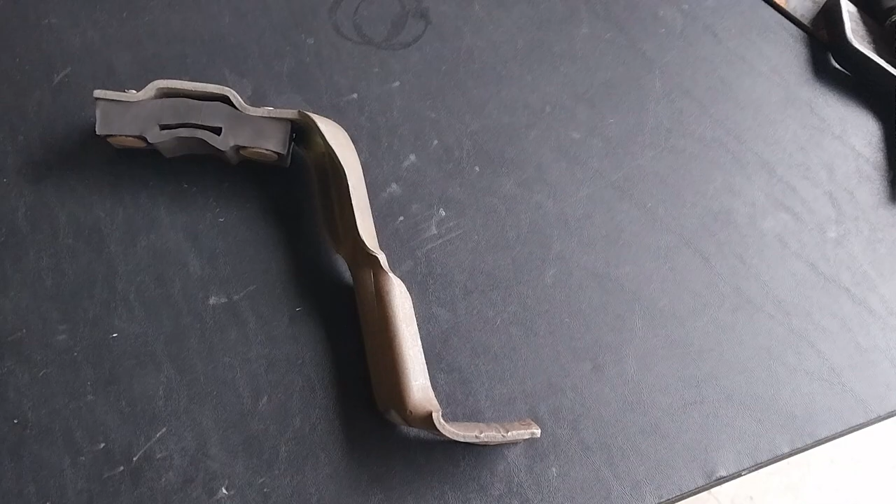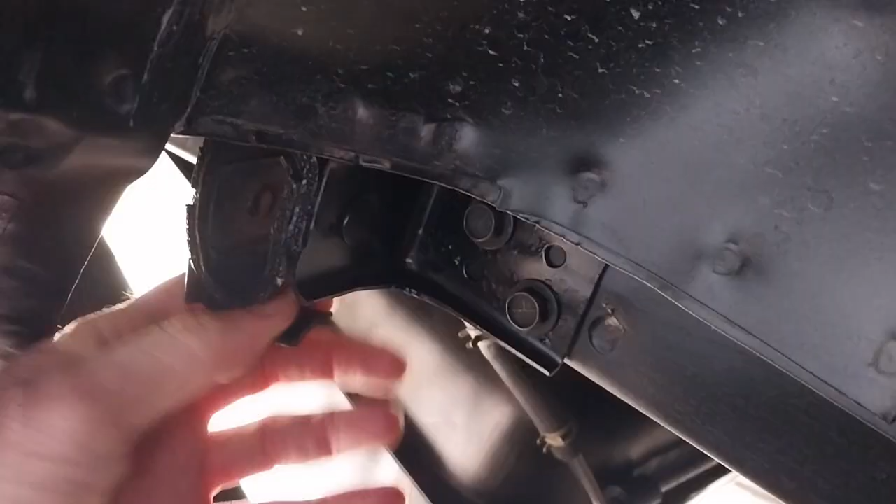All right, looking to install my exhaust hanger. This is on the rear left side. In a previous video I showed you guys I already installed the one on the rear right side. Okay, and now I've got the other one here.

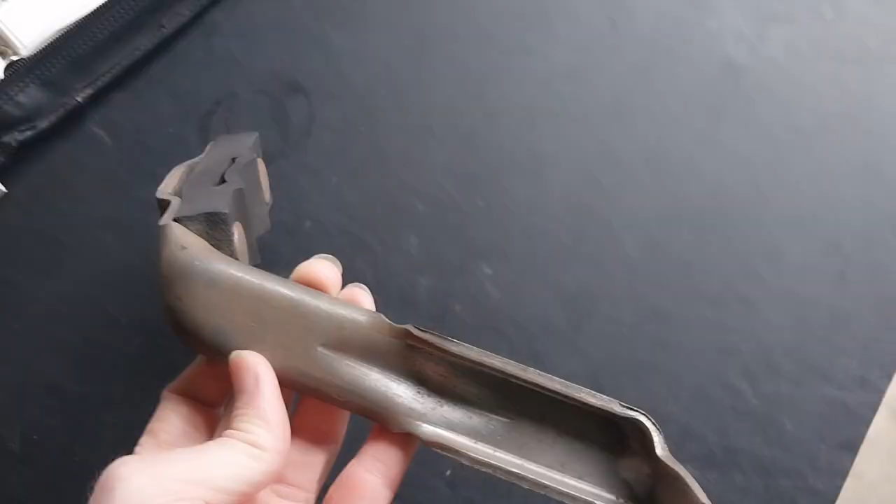So I bought that one and then this one used. I was able to find a guy who had a bunch of extra parts, and I got a hold of the hangers. This one here was particularly hard to find, but I cleaned it up. It's been a while, so it's kind of starting to rust over just a little bit. You can kind of see it, so it'll need a little bit of cleaning before I do a final install, but it's pretty thick and in decent condition.

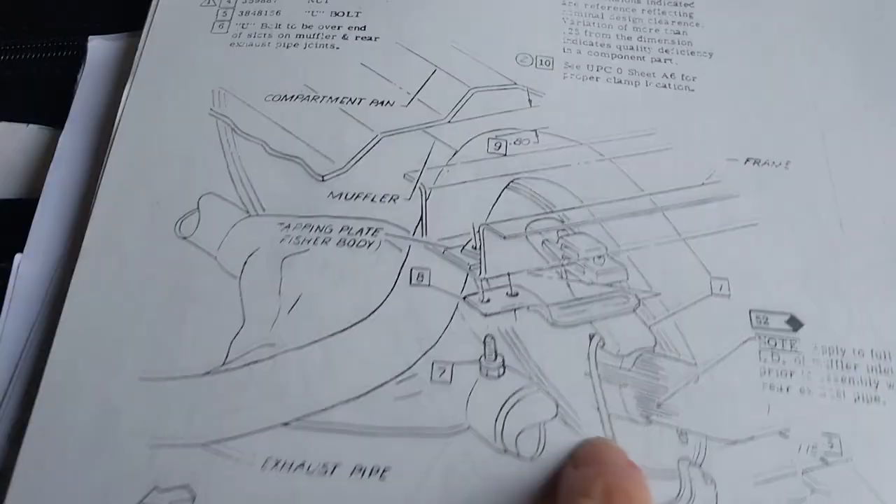The rubber's in decent condition. The only thing I cannot find anywhere is the bracket that attaches to the frame. So there's the hanger right there. It goes down and curves down, and then right there's the exhaust pipe, and it straps to it. And then this piece here is the hanger that I cannot find.

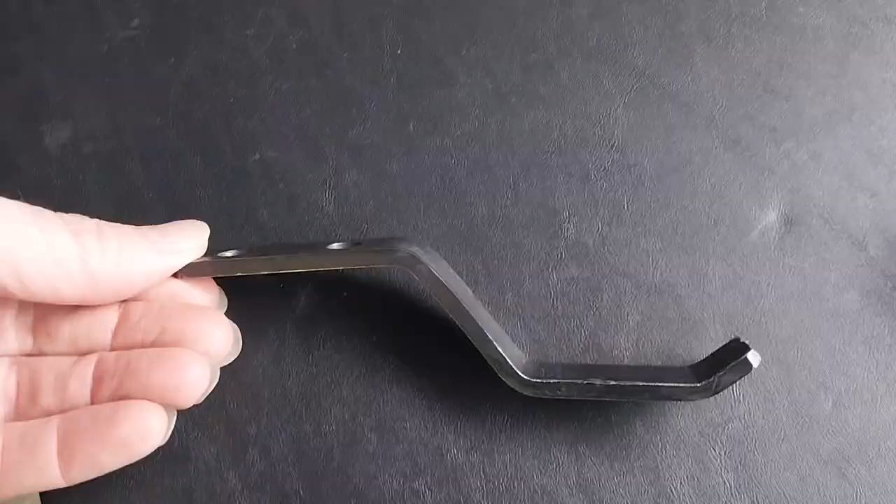So I did make attempts to make one. This is it right here. But it's not wide enough. It moves around way too much. It's half the width that I need.

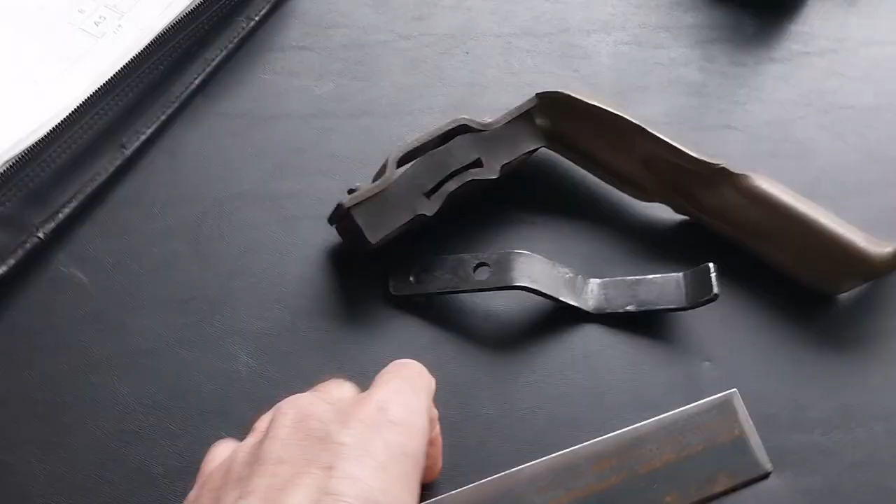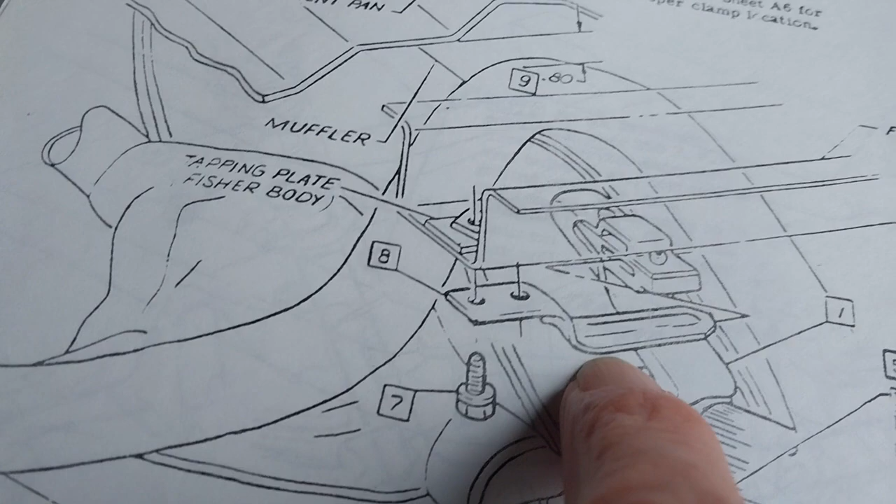So I was able to get another piece of metal like that, and that is the perfect width, and it'll fit nice and snug right in there. So what I'm going to do is get this cleaned up and bend it to fit that size. I've got the hole location right in this one here, so I'll transfer the holes over. Looks like it comes down at a 90, down and then over again, and from the looks of it has some type of hump in the center. I'm not going to do that, but I'll do these bends, grind it, get a nice round nose to it, clean it up, and go from there.

And then for the install, again, it's on the back left, right there - these two holes here, they're in there. So these bolts broke off, so I had to re-drill them. That's why they look nice and shiny in that location, because I had to rethread those and drill them out.

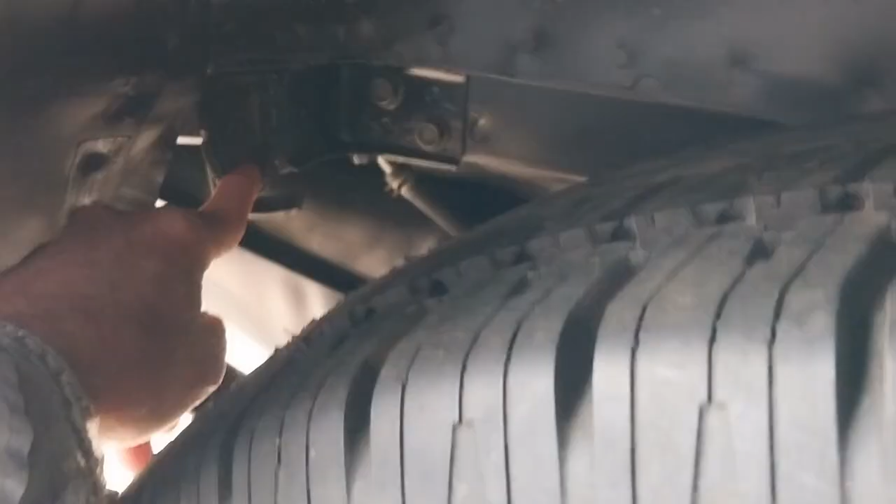A reminder, this is a single exhaust, so if you have a dual exhaust, it's different. The dual exhaust takes advantage of these and more of these - I think there's one of these on both sides and a different hanger. So there's actually a kit you can get for the dual exhaust. Single exhaust is nowhere to find anywhere, so I had to track down the parts. I'm going to get working on this and go from there.

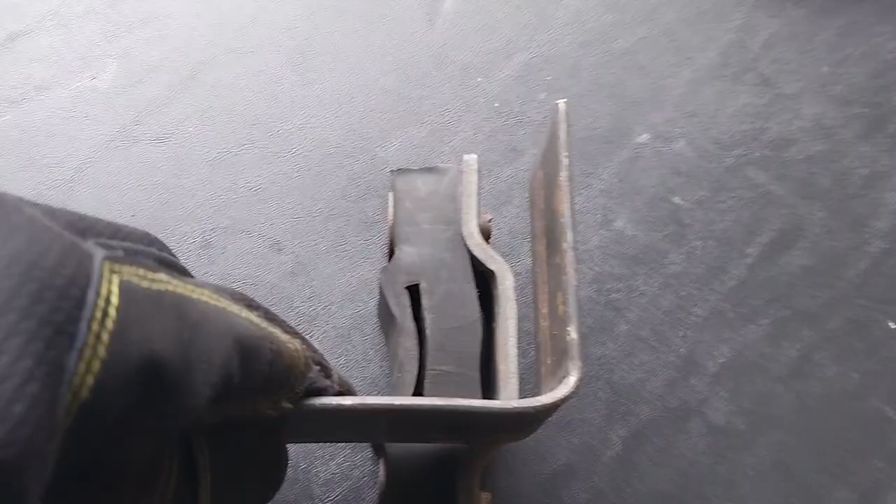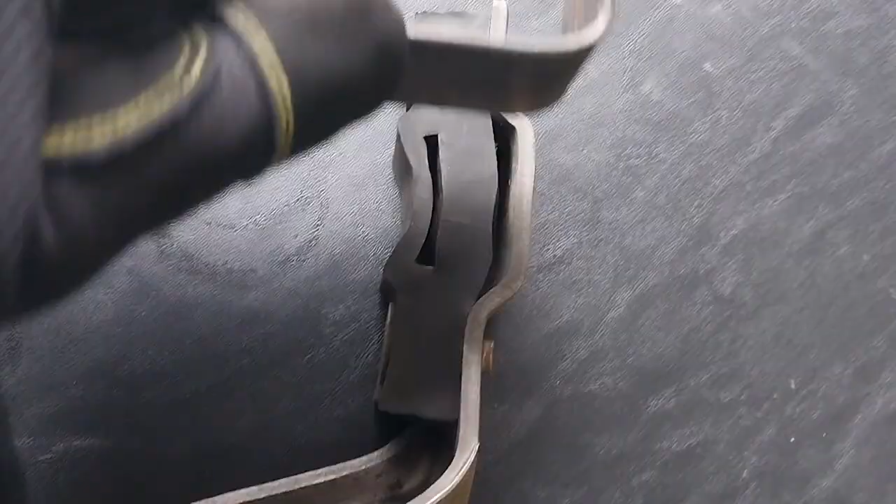All right, get the first bend in. So then the other bend, you want to make sure you have clearance. Okay, so you got that gap - here's your frame of the car. You want to make sure that it has enough clearance, plus it's going to move around. You want it to come down that distance, because this end bolts to the car like that.

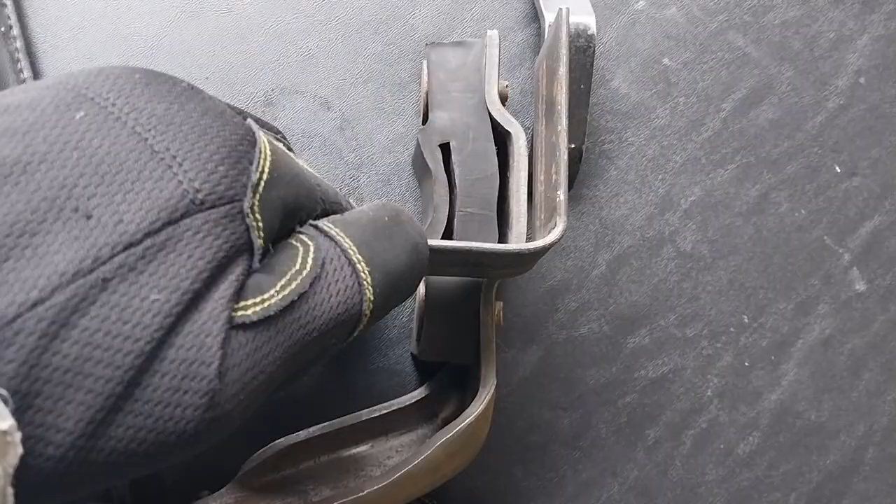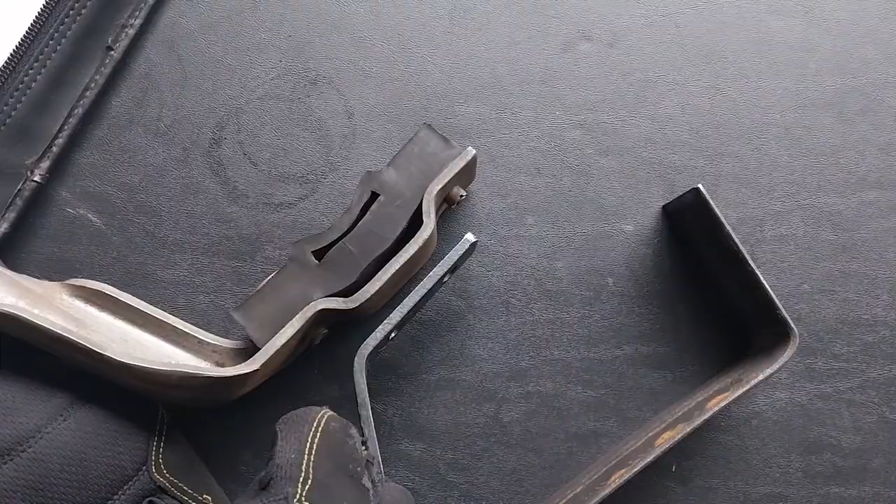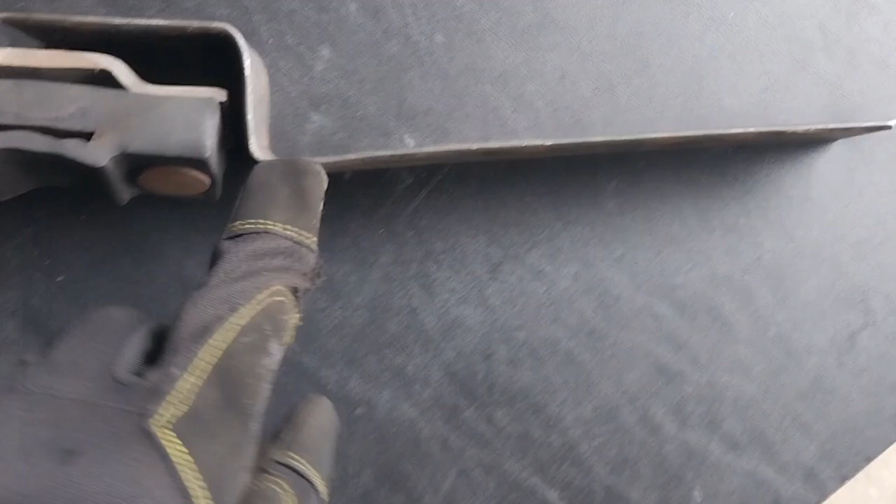So I'd say right about my finger is about the good distance we need - maybe a good 3/4 inch or 1/2 inch between the bracket. All right, there we go. So it's going to sit at that level. We've got the bolt that comes down where my finger is, so it needs enough room for this thing to be moving around and not bump up against the top. So that's probably good.

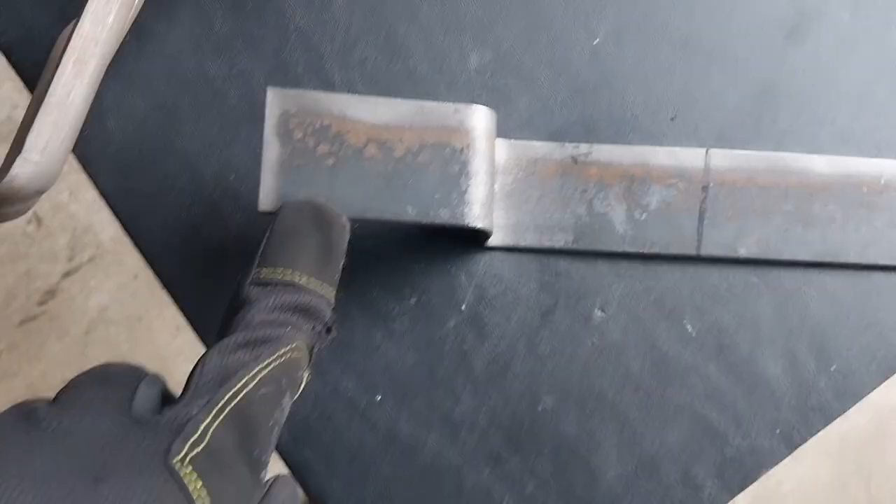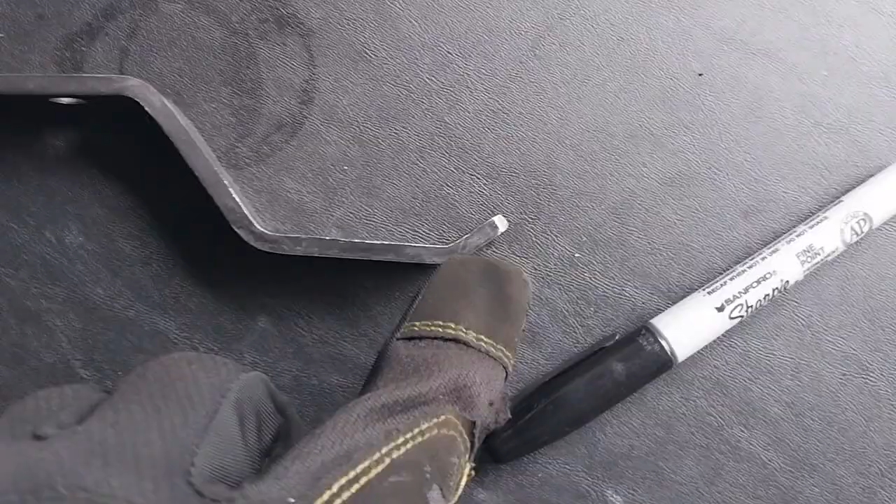And then our length - we need to cut off. Based on the drawing, it's really hard to see the exact length, but I think it's almost about 1.5 times, maybe 1 3/4 the length of this top part here. All right, so I'm going to go about 3 inches. What I'll do is round this edge here, the front edge, and then have this bent up just slightly. I don't know how that nut does not slide off, so I may put that bend in at the end like I did here. We'll see how it goes when I'm done.

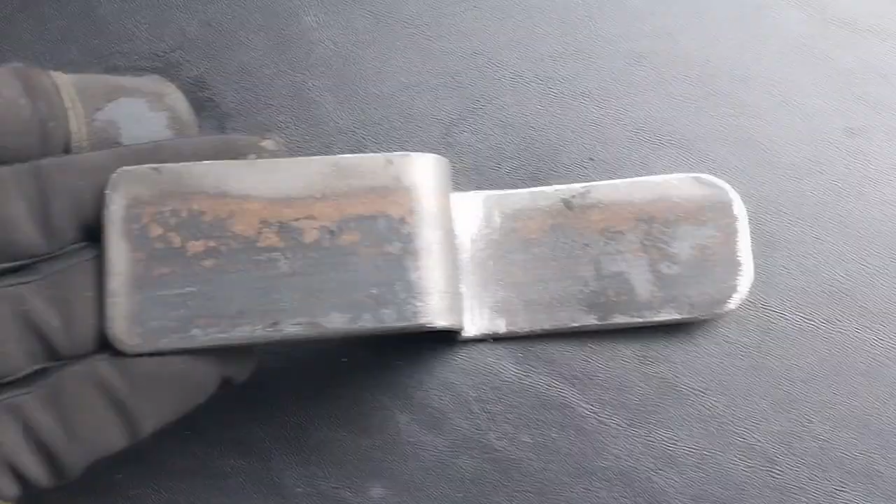All right, there we go. So I will drill the holes and get this cleaned up and go from there. All right, there we go. Cleaned up, there we go. The hole's in there, this is all cleaned up.

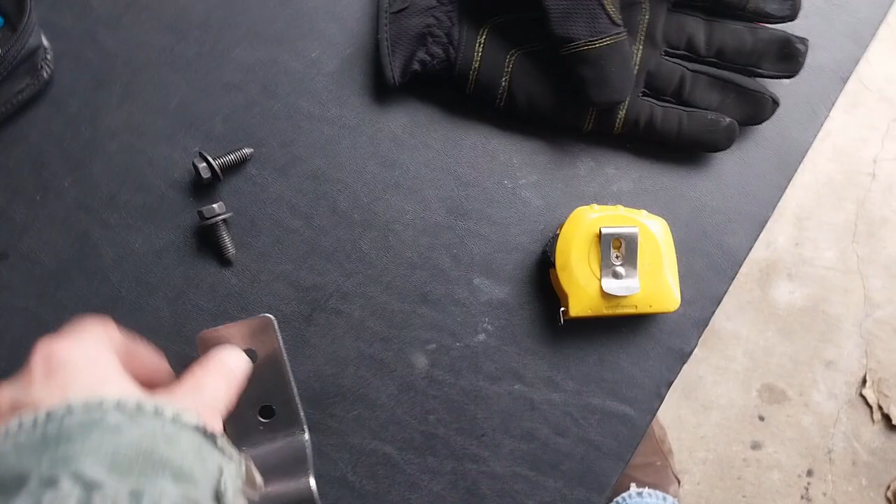All right, let's get this sucker installed. Like I showed you before, you just got these two bolts, and then it goes up in the corner. So I'll do that real quick. All right, there we go, so I've got it bolted up.

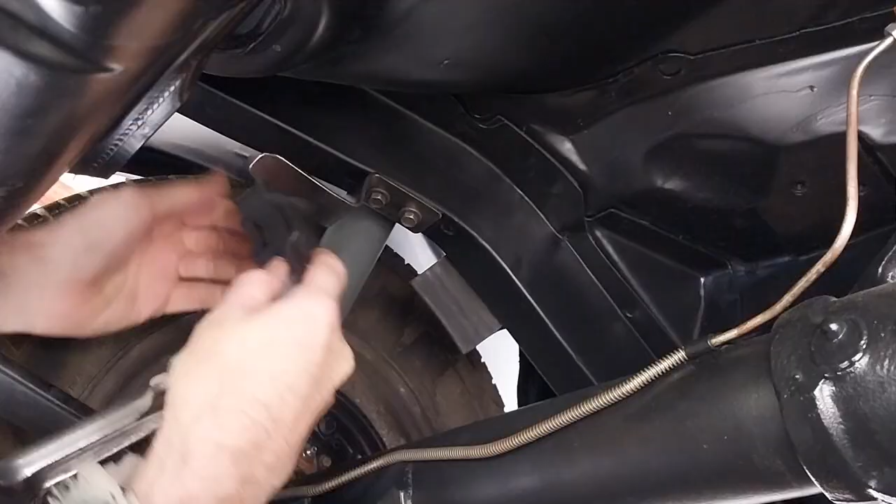And again, the exhaust comes from the front, goes over the axle, and then back down right about here. That's what this is for - this holds it as it goes past. That should be nice and snug.

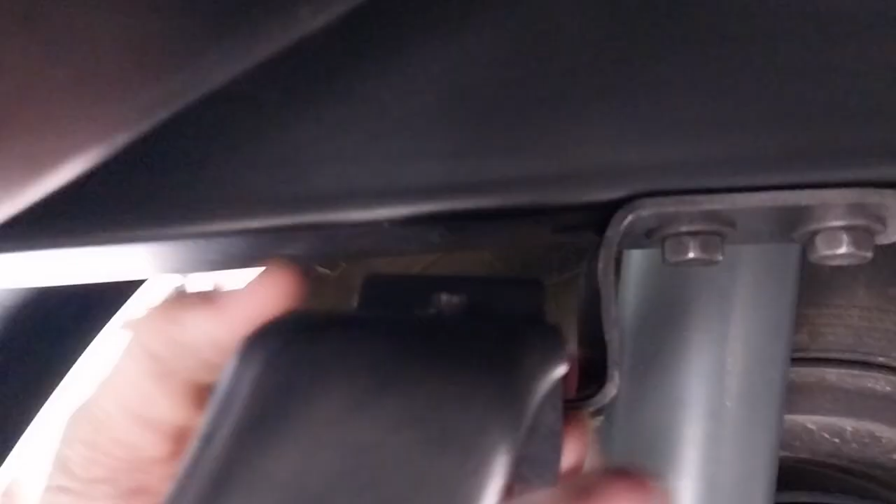But again, I want to have that good enough distance, your finger, because this thing moves around on you. So you don't want to make this part too short - otherwise you don't have that clearance for this thing to move a little bit, and plus you can't even get it on either. So having about finger width is probably good. It's not going to move around this much, very little, but it works.

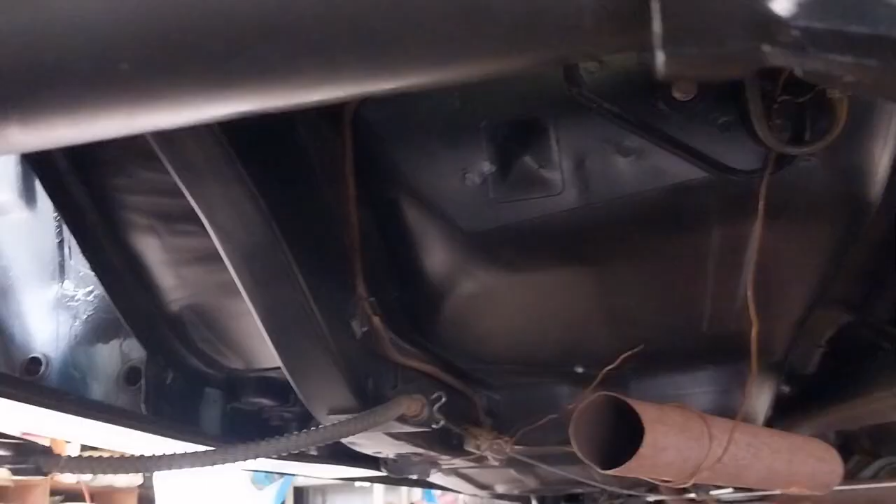It's stiff. The one I had before was just terrible. So all right, man, that's it. I got the other one on there, and there's my exhaust stops right there. When I'm ready to get my exhaust in, I'll probably have to end up hiring somebody else to do that, but I can drive it.